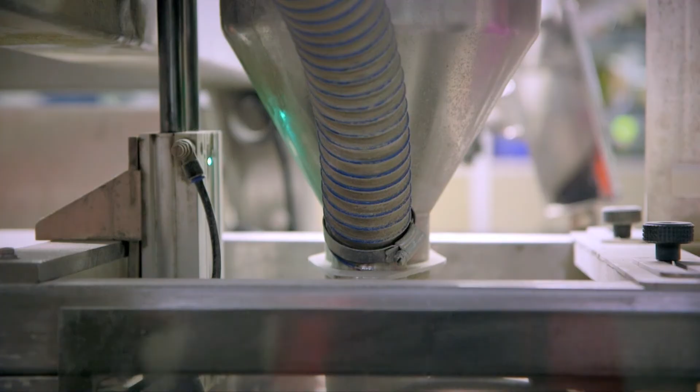Norcros Adhesives is part of the Norcros Group, and alongside sister company Johnson Tiles, it is based at the heart of the UK ceramics industry in Stoke-on-Trent. The company is a leading British manufacturer.

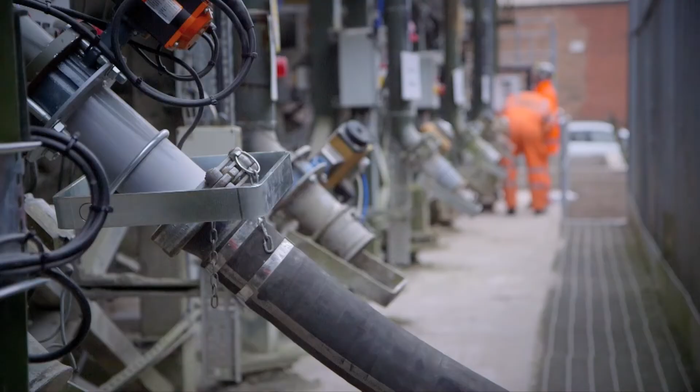The product range includes branded adhesives, grouts and surface preparation products for fixing ceramic and porcelain tiles, mosaics, natural stone and marble. Quality is vital to Norcros Adhesives, so only the finest raw materials are used, along with increasing proportions of recycled materials. Strict quality control checks are performed on all incoming materials upon delivery.

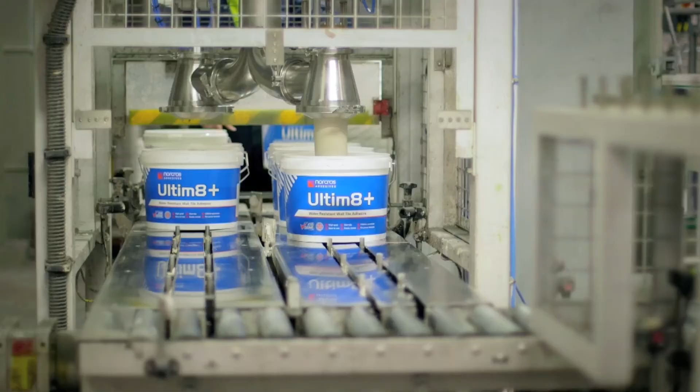The modern, fully automated manufacturing and packaging plant employs lean manufacturing techniques for the high-volume production of polymer-modified powder adhesives, grouts and screeds, together with professional performance ready-mixed adhesives.

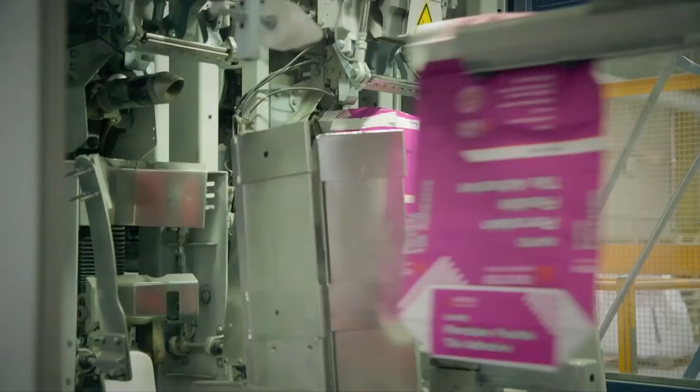Once the products are manufactured, the extensive care doesn't stop there. Each batch is individually tested, and high-tech machinery seals and palletizes each bag.

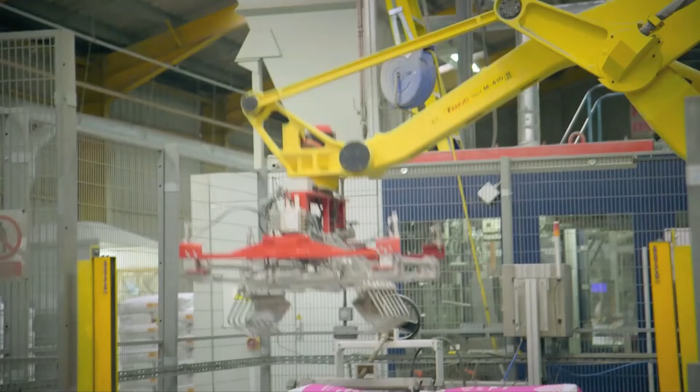Investment in state-of-the-art machinery at all stages of the production and packaging process enables Norcros Adhesives to manufacture, package and distribute technically advanced products within very precise manufacturing parameters, and with a minimum of wastage and environmental impact.

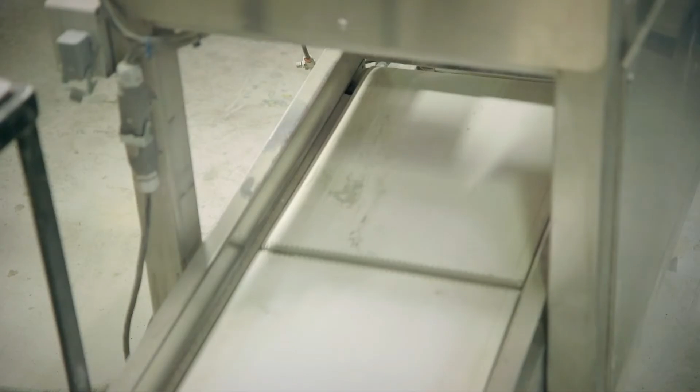Norcros Adhesives takes its environmental responsibilities seriously and is ISO 14001 accredited for reducing waste and improving resource efficiency.

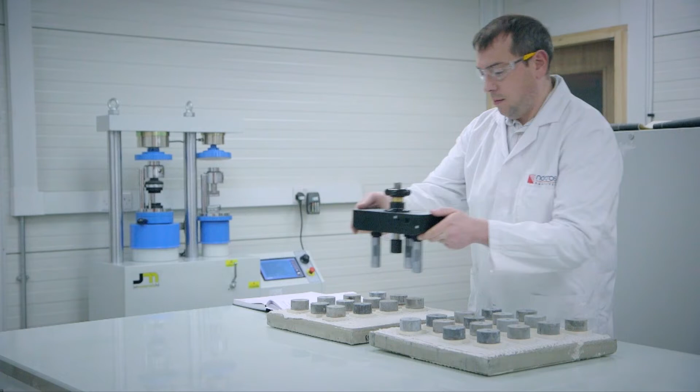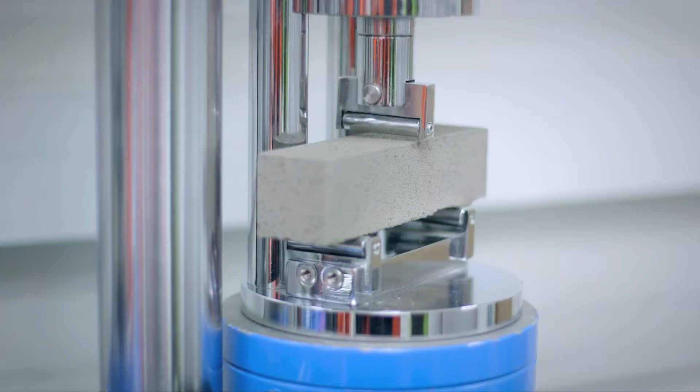Norcros Adhesives continually refines and develops its product range, improving existing products and adding innovative new ones. The company's future growth comes through continued innovation and rigorous R&D to create the next generation of adhesives. This is the way Norcros Adhesives keeps one step ahead of its competitors.

The company's recent investment in a new skills centre allows for the delivery of a wide range of practical courses for tilers and retailers, giving real insight into product development and installation techniques. In this way, investment by Norcros Adhesives is benefiting the industry as a whole.

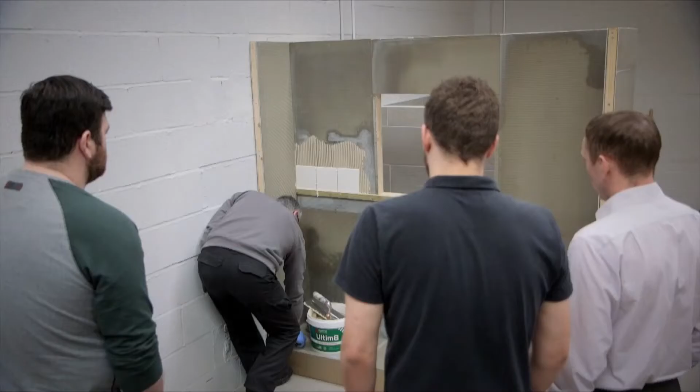The Skills Centre enables Norcros Adhesives to deliver RIBA-accredited CPD courses, which are a welcome resource for architects, helping to drive up product knowledge and technical expertise within the industry. As well as theoretical training, students also get the chance to try out practical skills that they have learned.

Exceptional training support is at the heart of the Norcros Job Done ethos. The Technical Helpline is a one-stop resource for advice and support on products, system installation and more. Site visits, technical reports and remedial advice are always available.

All Norcros products come with a lifetime guarantee. It's the company's promise to the industry. It all adds up to a success story in manufacturing, sales and distribution for Norcros Adhesives. It is the one-stop shop for high-quality, British-made products.

By the end of the seminar, when faced with common tiling backgrounds and bases, the learner should be able to identify the watch points which can lead to common tiling failures and know how to avoid them.

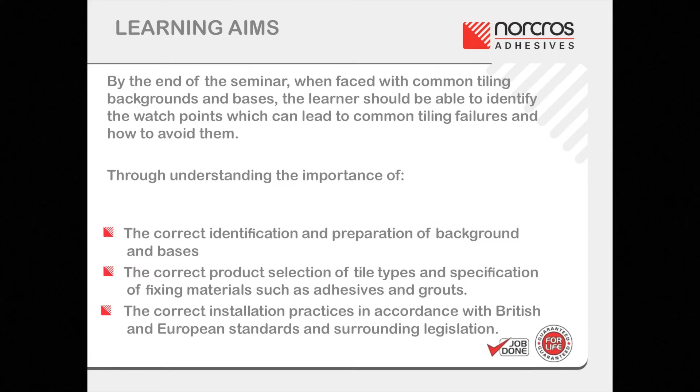Through understanding the importance of the correct identification and preparation of background and bases, the correct product selection of tile types and specification of fixing materials such as adhesives and grouts, the correct installation practices in accordance with British and European standards and surrounding legislation.

Considerations when specifying tiling for floors: tiling over wood-based substrates, tiling over screeds, best practice floor tiling installation. Considerations when specifying tiling for walls: tiling over plasterboard, tiling over tile backing boards.

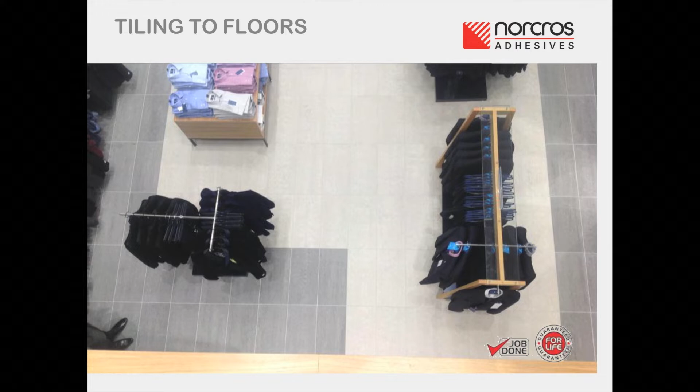Tiling to floors. It is vitally important to check the flatness of the background or subfloor before tiling begins to ensure that the tile can be solidly bedded.

Backgrounds should comply with the requirements of British Standard BS 5385, which states that, when checked using a 2-metre straight edge, any gap under the straight edge between points of contact does not exceed 3 mm. Local corrections of the background may be necessary where the gap exceeds 3 mm.

Subfloors should be laid to surface regularity SR1. If the surface is inadequate, it should be corrected before tiling begins.

The surface flatness of the finished tiling should be such that, when checked with a 2 meter straight edge with 3 mm thick feet at each end, the straight edge should not be obstructed by the tiles and no gap should be greater than 6 mm.

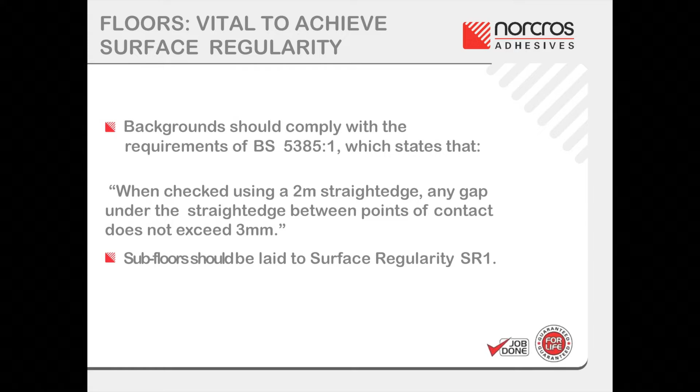Surface regularity and a robust aesthetic tiled finish requires not only good installation techniques and product selection, but also the correct treatment of bases to be tiled onto.

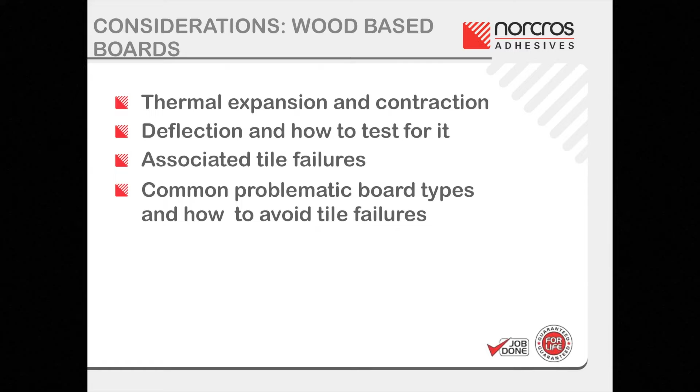Tiling over wood-based boards. Considerations when using wood-based boards: 1. Thermal expansion and contraction. 2. Deflection and how to test for it. 3. Associated tile failures. 4. Common problematic board types and how to avoid tile failures.

Wood is very reactive to temperature and expands and contracts at a different rate to the sort of materials that are used within tiling installations, such as cement-based adhesives, ceramic, porcelain, and natural stone tiles. It expands across the grain further than along the grain.

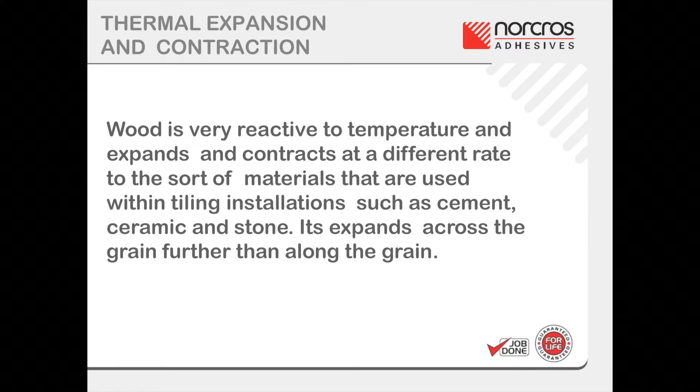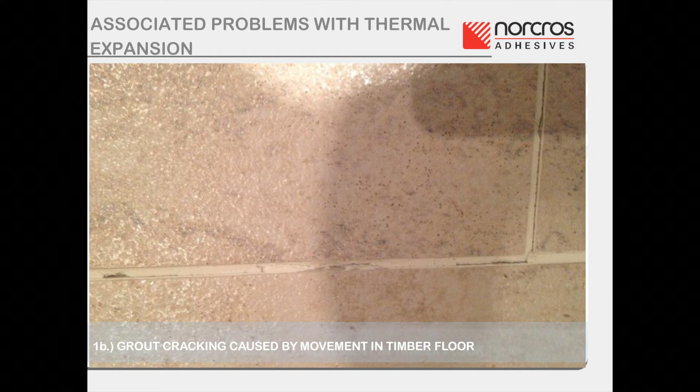Associated problems with thermal expansion. The photograph illustrates grout cracking caused by movement in a timber floor. The photograph shows grout cracking caused by movement in a timber floor. The cracking caused by movement in a timber floor is clearly shown in the image.

Deflection is defined as the movement or curvature created in a timber board or sheet when it is subjected to loading. Heavy loads can cause deflection, leading to buckling of tiles and cracked tile installation. Therefore, it must be ensured that the floor will be able to support the expected weight of the tiling materials with minimum deflection. The level of deflection can depend on the weight of the tiles and the rigidity of the existing timber floor.

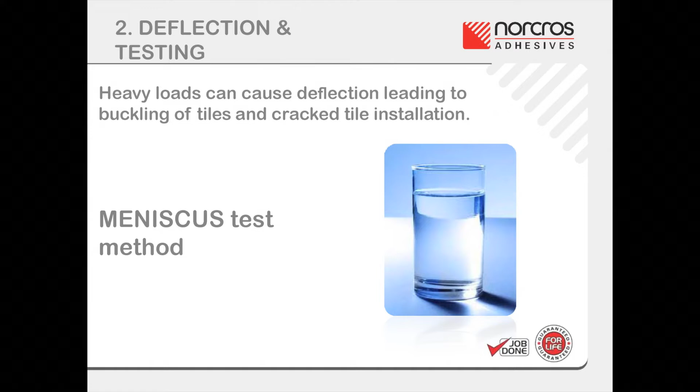In order to test the surface for deflection, use the meniscus test method. Simply put a glass tumbler filled with water onto the floor and stand approximately 1 meter away. Jump up and down. If the water is spilt, then the deflection is too high.

2 common types of problematic timber floors include plywood and chipboard. When tiling to plywood floors, always ensure that the plywood is a high-quality Class 3 external grade WBP or marine grade plywood, as recommended in BS 5385 Part 3. There has been an influx of cheap low-grade plywood which is often impregnated with an oil which inhibits adhesion and prevents the adhesive from bonding, resulting in delamination at the plywood to adhesive interface.

As mentioned earlier in the seminar, the meniscus test can be carried out to assess whether an overlay is required. If the meniscus test indicates that the deflection in the floor is minimal, then a rubber crumb S1 or S2 adhesive may be used. If the meniscus test indicates that the deflection in the floor is excessive, then to minimize deflection movement stresses, BS 5385 Part 3 recommends overlaying the timber boards with plywood.

Some existing floors may require strengthening, for example with an overlay of Class 3 exterior grade WBP plywood to BS EN 314 Part 2 or marine grade plywood to BS 1088. BS 5385 Part 3 recommends the required rigidity might be achieved by fixing WBP exterior grade plywood of 15 mm minimum thickness over existing boards and screwed to joists in existing boards at 300 mm intervals.

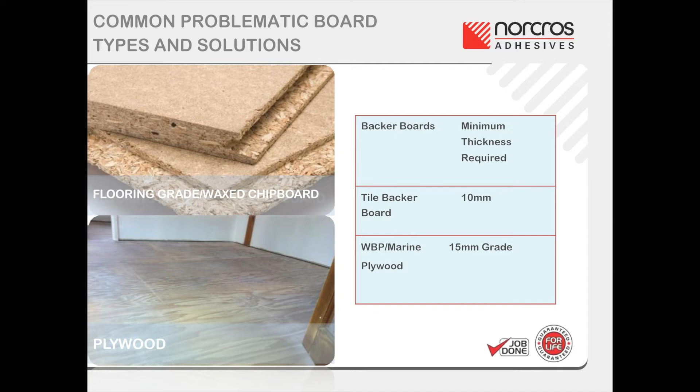Refurbishment of press office cafeteria. The challenge was to provide fixing systems that would enable tiles to be fixed to 3 different substrates, including concrete, existing floor tiles, and woodblock flooring.

A rapid setting grey adhesive suitable for fixing porcelain was used on the solid concrete floors and also on top of the existing floor tiles. A slurry bonding coat consisting of 2 parts adhesive mixed with 1 part SBR primer was brush applied onto the tiles to provide a key before installation.

By using a 2-part rapid setting elastomeric adhesive suitable for tiling to wood surfaces, it was possible to fix tiles securely over the woodblock flooring after the floor had been prepared. An epoxy grout was then used in all areas to ensure a hygienic, easy clean surface.

Tiling onto screeds. These are the considerations: 1. Moisture content and recommended drying times. 2. Expansion and contraction, shrinkage. 3. Common problematic screed types and characteristics to consider.

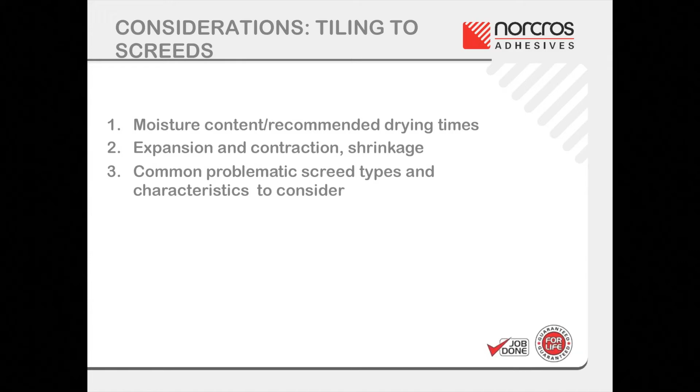When laying cement sand screeds, initially the water must be retained within the screed whilst it gains strength, but after a period of around 7 days, the polythene sheet stopping the water evaporation will be removed and the screed should be allowed to dry for a minimum of an additional 14 days.

BS 5385 Part 3 specifies that a screed should be left for a minimum of 3 weeks to dry prior to tiling. This differs from the recommendations in BS 8204, which recommends an allowance of 1 day per millimetre for thicknesses up to 50 mm. Thicker substrates may require 2 days per millimetre.

The time taken for anhydrite screeds to dry is generally around 1 day per millimetre up to a thickness of 40 mm, with an additional 2 days per millimetre above 40 mm. However, this will vary between brands, so it is best to seek the advice of the manufacturer. It should be noted that the removal of laitance will help to dry the screed.

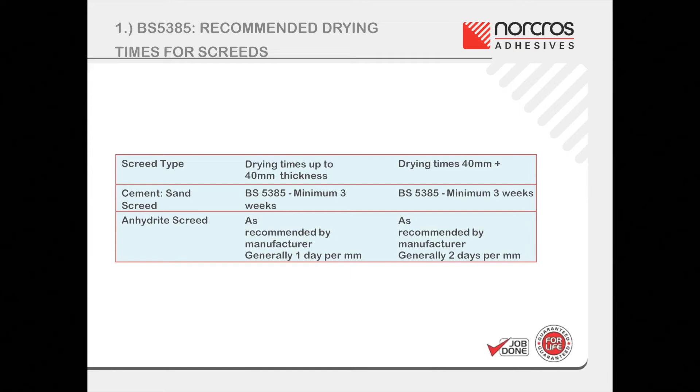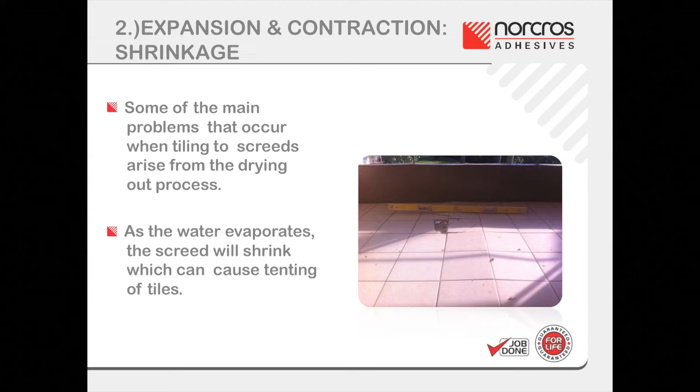The main problems that occur when tiling to cement sand screeds arise from the drying out process. As the water content evaporates from the screed, it shrinks. This can cause problems as tiles may tent if the screed is tiled onto before it is completely dry.

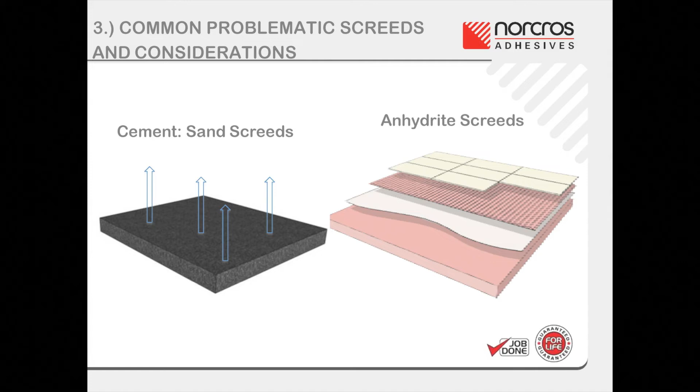Common problematic screeds for tiling onto are cement sand screeds and anhydrite screeds, both for different reasons. Firstly, let's take a look at cement sand screeds. Cement sand screeds generally consist of a 1 to 3 or 1 to 4 parts cement and sand mix, and are usually laid at a thickness of around 50 mm.

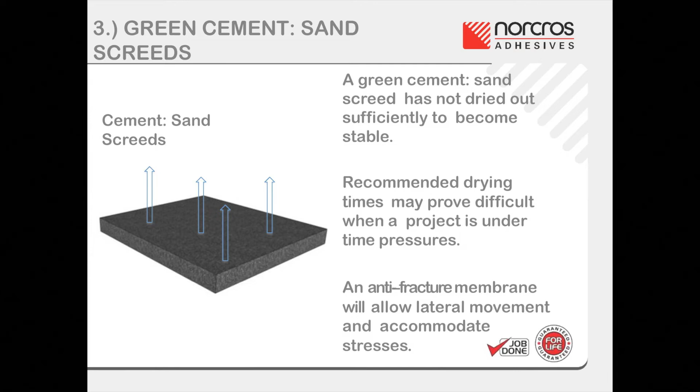A cement sand screed can either be applied to a concrete base or a damp-proof membrane. The screed is referred to as being green from initial application through to the point at which it becomes fully stable. The best solution for tiling to green screeds is to use a suitable anti-fracture membrane to allow lateral movement between the screed and adhesive layer to avoid the debonding of tiles, as the screed may shrink further and move as it settles. This method can reduce the recommended drying time from 3 weeks to as little as 48 hours.

Adhesive products were used during refurbishments for the installation of the workshop floor. Working to strict time constraints, whilst providing solutions for issues such as problematic substrates due to solvent ingress in the screed, a full program of works was required to keep the workshop functional.

This was achieved by using the following products: an anti-fracture membrane, a rapid setting adhesive suitable for use with porcelain tiles, an SBR primer, a flexible floor and wall tile grout.

Anhydrite screeds offer a number of advantages over cement sand screeds, including large areas can be laid in a short time. Up to 2,000 metres squared can be laid in a single day compared to 100 to 150 metres squared when using conventional sand cement screeds.

They are suitable for use with under-tile heating as long as the elements are covered by at least 25 mm of screed. They are high strength, achieving a compressive strength of between C20 to C35. They are eco-friendly, having a low manufacturing carbon footprint and also being recyclable.

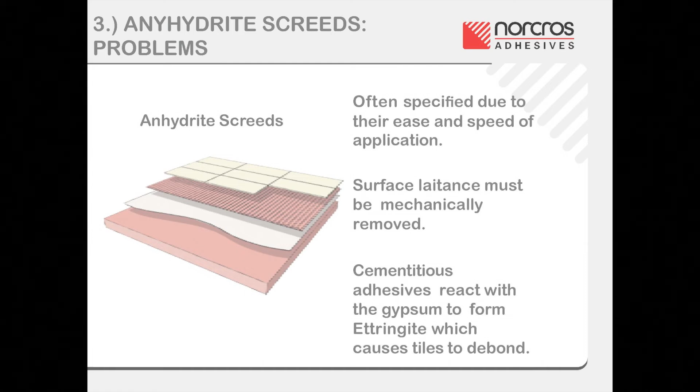Due to the gypsum content of the screed as mentioned previously, there are 2 solutions to prevent the formation of ettringite at the adhesive and screed interface.

Solution 1: using a cement-based adhesive with an SBR primer. The screed must have achieved a relative humidity of not greater than 75%, generally at least 80 days for a 60 mm thick screed. The first solution is used when it is intended to fix the tiles in a cement-based adhesive.

To avoid the formation of ettringite, the screed must be sealed with an SBR primer. The first application should be diluted to 1 to 4 parts SBR to water and should be allowed to dry before applying a second coat of SBR diluted to 1 to 3 parts SBR to water, applied at right angles to the first.

Once both coats are dry, check that the screed is completely sealed by dropping water onto it. If the water sits on the surface in a bubble, the screed is assumed to be sealed. However, if it is absorbed, add a final coat mixed at 1 to 2 parts SBR to water and allow to dry.

Solution 2: using a gypsum-based adhesive. An easier solution for tiling to an anhydrite screed is using a gypsum-based adhesive. The screed must have achieved a relative humidity of not greater than 85%, slightly reducing the time required for drying. Some manufacturers supply such adhesives that reach the strengths of a C2 cement-based adhesive.

BS 5385 states that, if using a gypsum adhesive, only remove loose debris from the surface. There is no need to sand the screed, saving time during installation. To ensure the surface is dustproof, prime with a 1 to 4 parts SBR to water mix to suppress any dust on the surface.

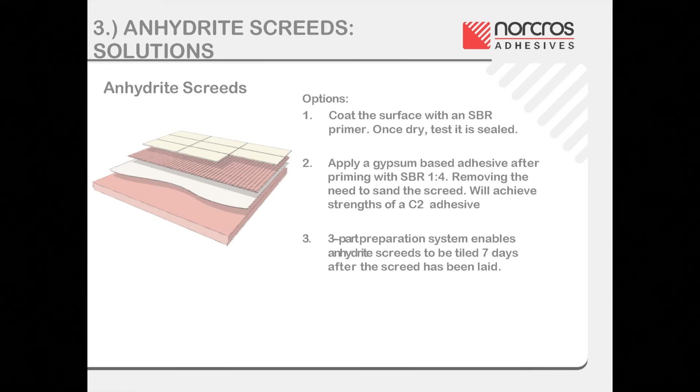Fast track method: a 3-part preparation system is now available which enables an anhydrite screed to be leveled or tiled using a cement-based adhesive after a minimum of 7 days, or a maximum 95% relative humidity. This means the drying time for a 40 mm screed is reduced by at least 32 days, and a 60 mm thick screed by at least 72 days, providing cost savings on the build.

On the bank of the River Thames by the Tower of London, Sugar Quay is a prestigious new development by a major house builder. Working closely with a leading manufacturer of anhydrite screeds, full on-site trials were performed on a new fast-track solution to tiling to anhydrite screeds.

The system offered major cost savings to the builder, enabling tiling to be performed just 7 days after the screed had been laid. It also allowed floors to be tiled before the underfloor heating system was commissioned, without any detrimental effect on the finished surface.

This is a major positive, as commissioning of underfloor heating can add delays of anything from 14 to 28 days before tiling can commence, and obviously cannot be performed until the services and the boiler are connected. It also managed to bring the project back on timescale, alleviating penalty clauses in the contract.

The trials were monitored and assessed by the house builder and an independent body, and were successful, resulting in the system being used on site.

Floor installation techniques: the key to a successful project using large format tiles is preparation of the background and solid bed fixing. Preparation of the background is vital because final adjustment of tiles is very difficult.

BS 5385 states in Part 3 that the notch troweling and buttering method combined should be used for fixing large format tiles and tiles with ribbed, deep-keyed or heavy buttoned back profiles. A thin coating of adhesive buttered over the backs should fill the deep keys before placing the tiles in position on the combed adhesive bed. There should be no significant increase in the bed thickness.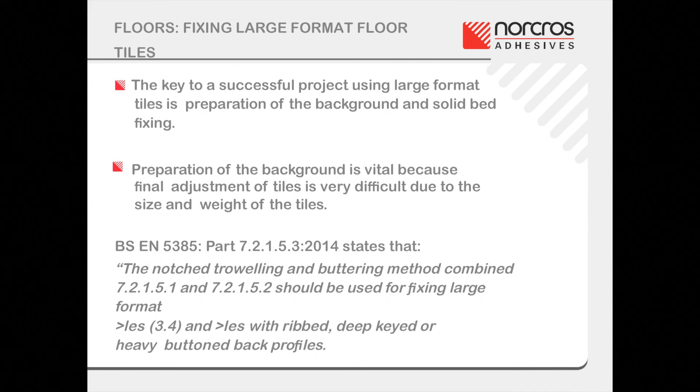For fixing larger format tiles, which have a greater surface area to cover with adhesive, bearing in mind the importance of achieving solid bed fixing on floors, use of a pourable, lower viscosity adhesive would be advantageous.

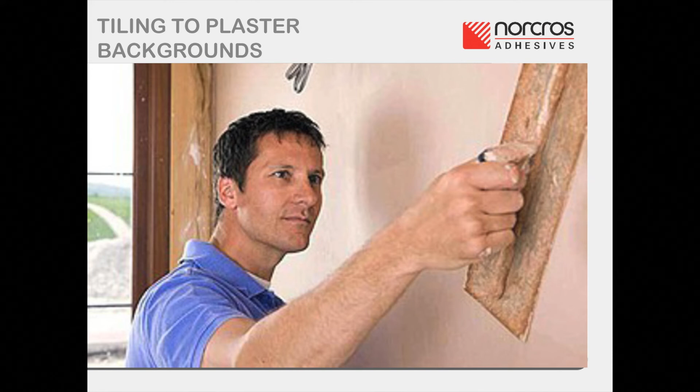Tiling to walls: plaster is one of the most common wall backgrounds. However, there are some factors which must be taken into consideration when applying tiles. Background preparation is imperative to the success of tile installations, and therefore the following steps should be taken to ensure a suitable background.

Firstly, it must be ensured that the plaster surface is a finishing plaster rather than the backing coat. The finishing plaster can be identified by its smooth and often shiny finish. Backing plaster is of a much coarser texture and can crumble easily, making it unsuitable to tile directly onto.

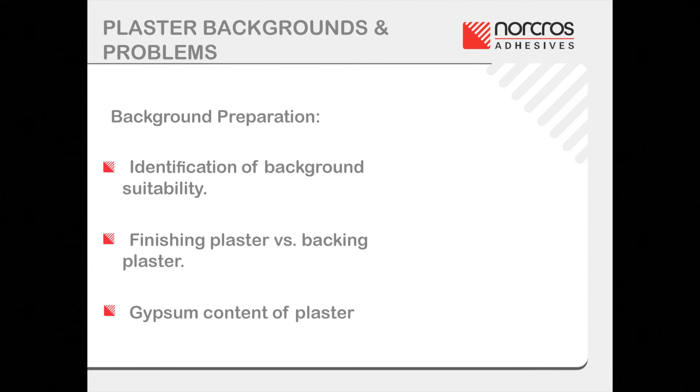The gypsum content of plaster can also provide a problem, as mentioned previously in this seminar, and must be taken into consideration when choosing a suitable adhesive. Once you are sure that the surface is finishing plaster and therefore suitable for tiling, you must dry brush the surface to ensure it isn't too smooth. This is so that the tile adhesive has a key and to ensure that any weak, fine material is removed.

Gypsum-based plaster requires special consideration. Ettringite crystals are formed due to a chemical reaction between cement and gypsum-based materials. To avoid this, use an SBR primer and C2 adhesive, or alternatively, a suitable ready-mixed acrylic or gypsum-based adhesive.

If using an SBR primer solution to suppress dust and/or reduce the porosity of the plaster, paint on 1 part primer to 4 parts water, covering the whole surface area to be tiled. Allow to dry before tiling commences.

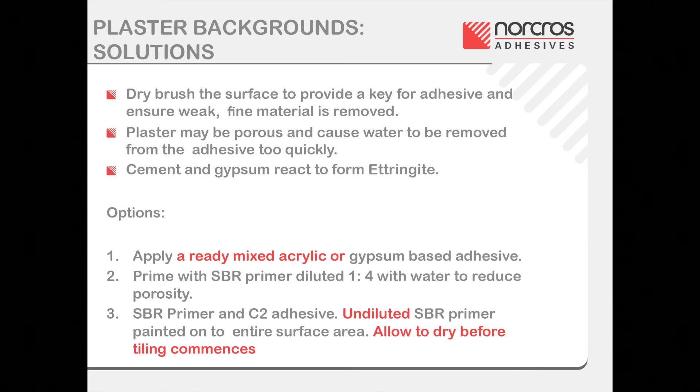Plaster must be dry before commencement of tiling. In good drying conditions, a plaster skim coat to an existing backing coat or board must be at least 7 days old. A new backing and skim coat must be allowed to dry for at least 4 weeks.

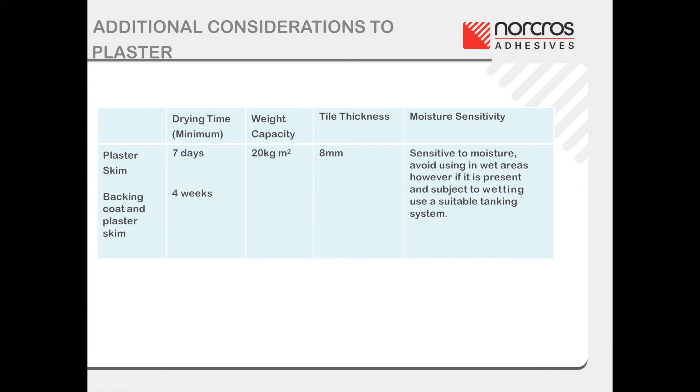Weight of the tiles and adhesive should also be taken into consideration when tiling to walls, and due to the lower weight capacity of plaster in comparison to some stronger backgrounds, this should be checked, particularly if large format tiling is being considered. Plaster is sensitive to moisture, and it should be avoided in wet areas.

Tiling to plasterboard.

The use of sheets and boards that are subject to movement from changes in moisture content should be avoided if at all possible. If such boards have to be used, they should be restricted to small areas and installed in such a way that they provide a dimensionally stable and rigid background. It is essential that all board edges are fully supported.

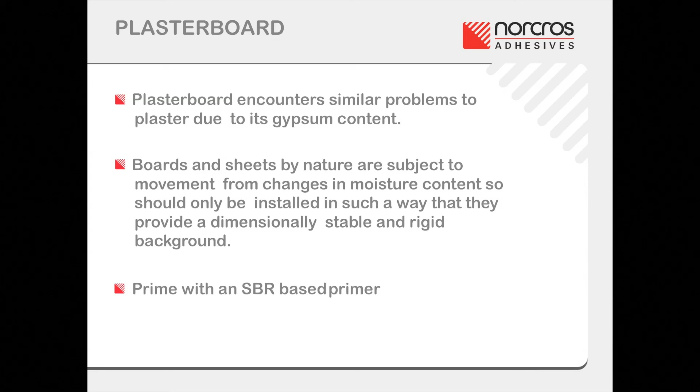As with gypsum plaster backgrounds, it must be ensured that the gypsum content of the plasterboard does not react with cementitious adhesives by priming with undiluted SBR primer. Plasterboard, like plaster, is also sensitive to moisture, and it should be avoided in wet areas. However, if it is present and subject to wetting, then a suitable tanking system should be used. Plasterboard can support a considerably heavier weight than plaster.

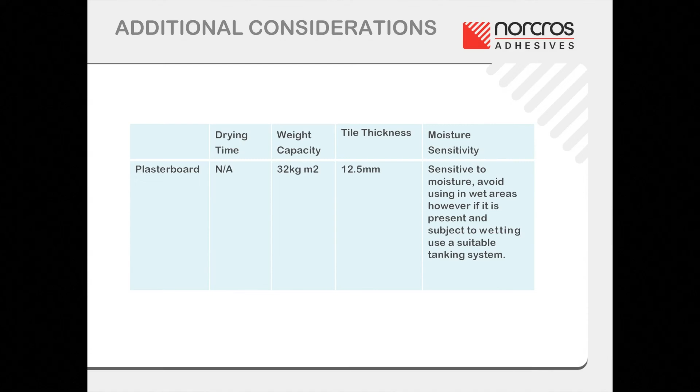Before tiling, it is essential to ensure that the board selected for tiling is dimensionally stable for the environment, so that it will not become distorted during or after the tiling installation or due to changes in moisture conditions. In the 2018 revision of British Standard BS 5385 Part 1, plywood is no longer recognised as being a suitable background for direct wall tiling and should be replaced with a bespoke tile backing board.

Tile backing boards provide a rigid, dimensionally stable substrate to moisture and thermal movement, which is suitable to receive a direct tiled finish, and are available in a number of materials, such as foam core, fibre cement, and other materials such as magnesium oxide. The board type should be selected to suit the relevant conditions.

Boards manufactured from magnesium oxide are considered more environmentally friendly than cement or gypsum-based boards, as they produce very little in the way of carbon dioxide emissions during the manufacturing process. Some boards are waterproof and only require joints to be taped with a waterproof tape. However, the relevant manufacturer's recommendations must always be followed regarding waterproofing requirements.

The board selection should take into consideration the overall weight of the tile and adhesive that they must support, the waterproofing requirements, and the substrate assembly, for example timber or metal stud-work, existing block or brick, plywood or plasterboard, as this will dictate how the backing boards are fixed.

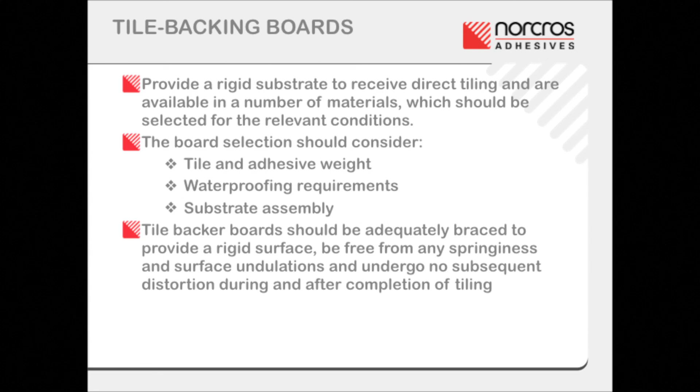As stated in the previous slide, some tile backing boards are waterproof and only require joints to be taped with a waterproof tape. However, the relevant manufacturer's recommendations must always be followed regarding waterproofing requirements.

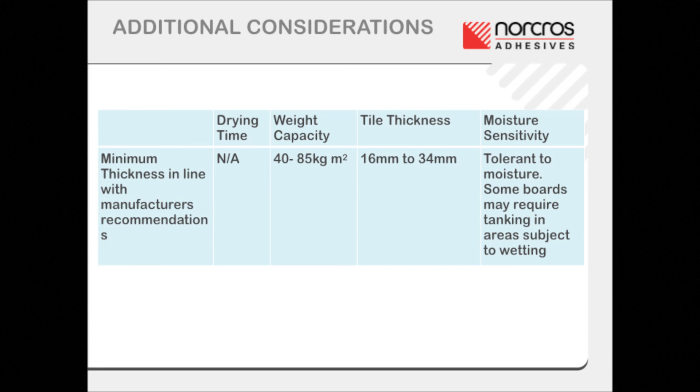The weight capacity of the board is dependent upon the type of board being used and can range from around 40 kg per metre squared to 85 kg per metre squared or above. Always check with the board manufacturer that the board selected is capable of bearing the anticipated load, ensuring that allowance is made for the weight of the tile adhesive.

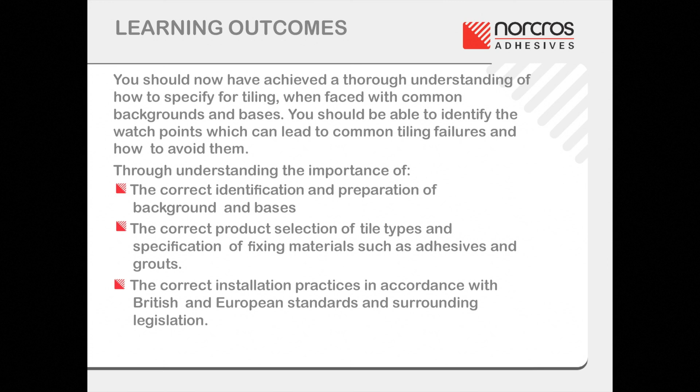You should now have achieved a thorough understanding of how to specify for tiling when faced with common backgrounds and bases. You should be able to identify the watch points which can lead to common tiling failures and know how to avoid them. You should also have a thorough understanding of the importance of the correct identification and preparation of background and bases, the correct product selection of tile types and specification of fixing materials such as adhesives and grouts, and the correct installation practices in accordance with British and European standards and surrounding legislation.